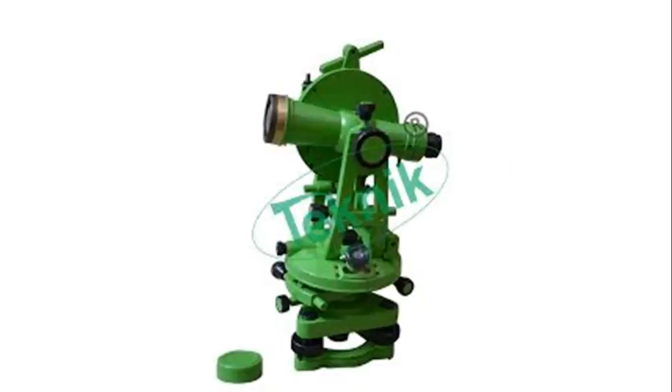So, before we discuss the setting out of curves, let us discuss some important aspects about the theodolite. So, you will see the picture of the theodolite here. Okay, let us discuss what are the various component parts of this theodolite. So, I'm starting from the bottom here. So, these are the three foot screws: 1, 2, and 3 on the back side. So these screws are used for levelling of the theodolite.

Okay. Now we have one screw here, and one screw here. So this screw is at a lower level as compared to this one. So this screw is called lower clamping screw. Okay, and the screw which is at a higher level is called upper clamping screw, or we call it lower plate clamping screw, and this is your upper plate clamping screw. Okay, now the screw which is adjacent to this lower clamp here, this one, is called slow motion screw for lower plate.

Okay, now similarly one screw is here which is not visible here. That screw is nothing but your slow motion screw for this upper clamping screw. So basically these two screws are very important. This is at a lower level, it is called lower clamping screw. This is at a higher level, that is called your upper clamping screw. And this screw is the slow motion screw for this lower plate, and we have one screw here that is the slow motion screw for this upper plate.

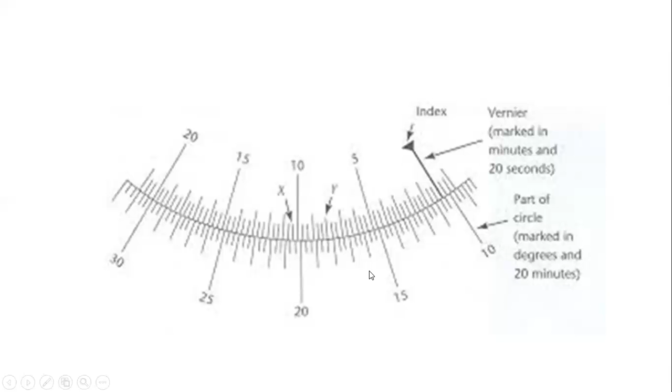So we have 10 degrees 20 minutes here, we have 5 minutes here, 20 plus 5 is 25. So 10 degrees 25 minutes, and this is your 40 seconds. So 10 degrees 25 minutes 40 seconds is the reading of the horizontal side. Okay, so in this way you have to take the reading of the theodolite.

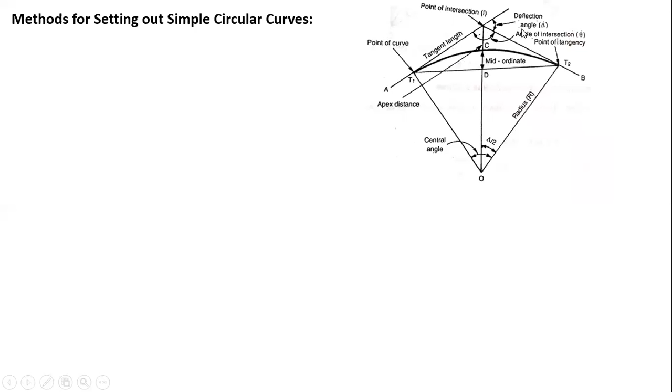Now I will come to the methods for setting out of simple curves. I explained this diagram in the previous lecture. The first step in setting out any curve is location of tangents. So this is the first tangent. This is the second tangent. So I have to locate 3 points. This point is T1, this point is T2, and this point is I. So how to locate these 3 points, I, T1, T2? This is the first step in setting out of the curve.

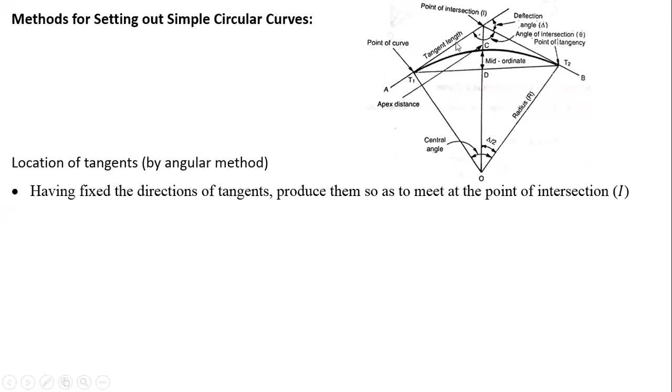So let us discuss having fixed the direction of tangent. This is my straight road here. When I extend this road, it will intersect at this point. So this is my point of intersection I. Now I have to set my theodolite here at the I location, set the 0, 0 reading on the horizontal side and sight the point T1, or locate your telescope in the direction of A with 0 degree 0 minute 0 second on the horizontal circle. So this is my direction of the telescope.

Next I have to rotate the telescope in the horizontal plane and measure this angle, that is the angle of intersection, which is nothing but your phi, and sight the point B. So this is my angle of intersection. Got the point? So I have to first locate the instrument at this point with 0, 0 reading on the horizontal circle. First, I have to sight the point A. Angle remains 0, 0. Then I have to rotate the telescope and sight the point B. So this is my angle of intersection.

Next, we have to find out what is the deflection angle. This deflection angle is equal to 180 minus this angle of intersection. Then calculate the tangent length. This is the formula for tangent length, we already discussed this last time: T is equal to R tan delta by 2. Delta is my deflection angle, which I just measured here. R is the radius of the curve, which is given in the problem. So we have to calculate the tangent length T.

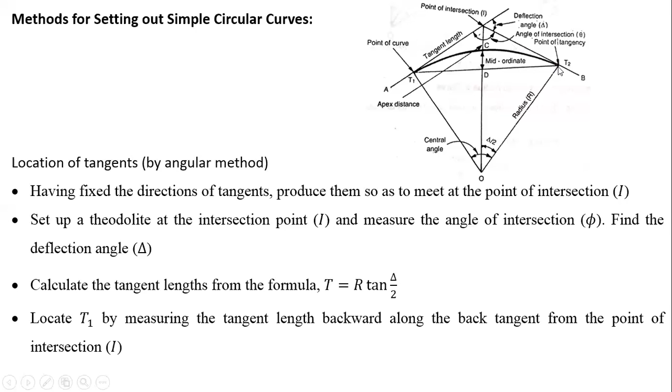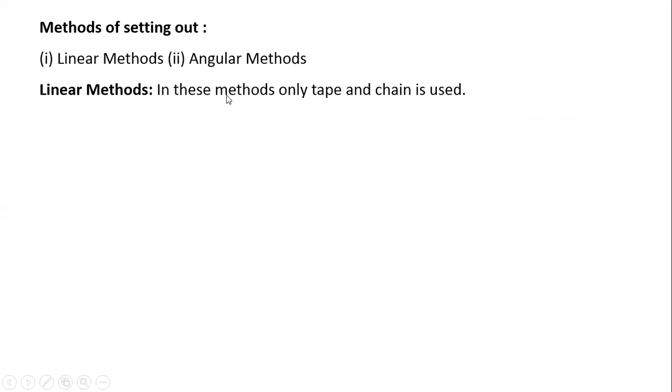Next is how to set out the curve. After setting these 3 points, there are two methods for setting out. One is called linear method, one is called angular method. In the linear method, only chain or tape is used. That's why it is called linear method. These methods are used when either a high degree of accuracy is not required or the curve is short. So for unimportant curves, we go for this linear method.

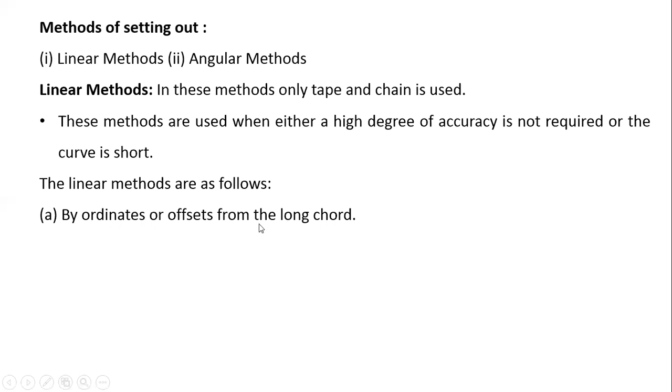The linear methods are as follows. There are 4 methods: by ordinates or offsets from long chord, by successive bisection of chords, by offsets from tangents, which has 2 methods, perpendicular offsets and radial offsets, and D, by offsets from chord produced. Among these 4 methods, the last one is the best method and is usually employed for the curve layout when a theodolite is not available.

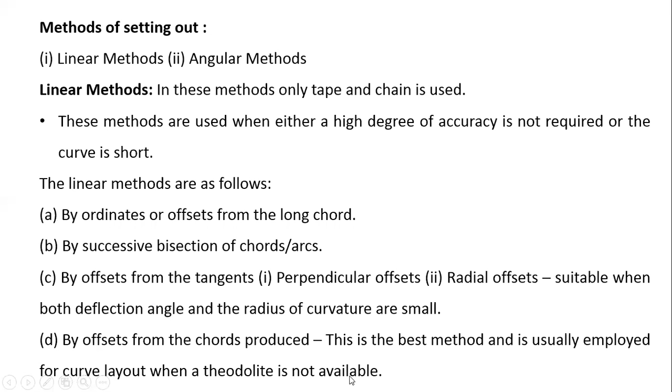Okay, so this method is the best method for setting out of the curve. Okay, so

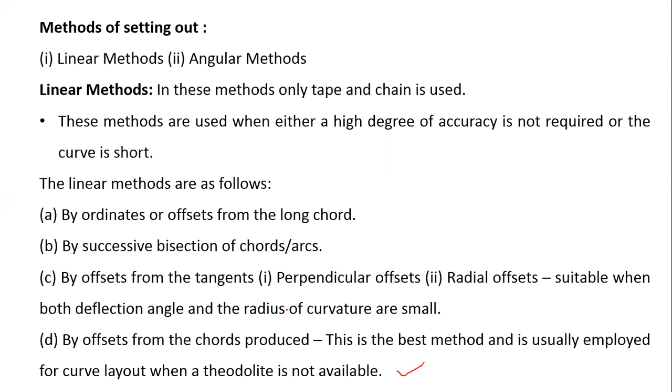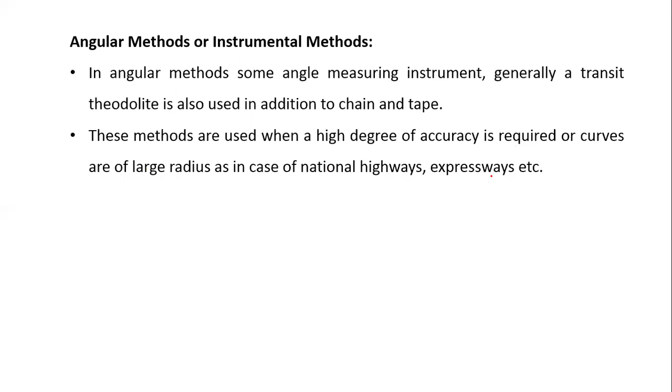Next is your angular methods. So in case of angular methods, some angle measuring instrument, generally a transit theodolite, is used in addition with the chain or tape. So these methods are used when a high degree of accuracy is required or the curves are of larger radius, as in the case of national highways or expressways. So for important curves of highways and railways, we are using the angular methods or the instrumental methods.

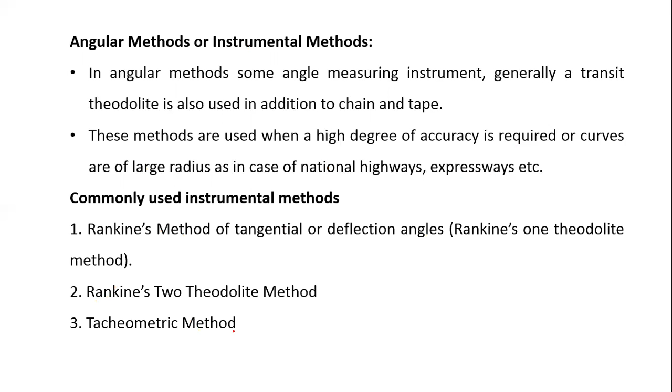Now the commonly used instrumental methods are Rankine's method of tangential or deflection angles. This method is also called Rankine's one theodolite method. Then we have Rankine's two theodolite method, and the third one is your tacheometric method. So in our course, we have 2 methods, the first method and the second method. We will discuss these 2 methods now. So let us first discuss setting out the curve by Rankine's method of deflection or tangential angles.

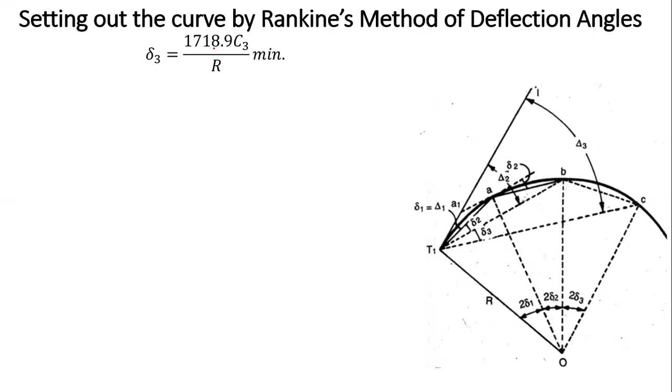Similarly, del 2 is equal to, just in place of C1, I put C2 here. That's all. Everything remains the same. So similarly, del 3 is equal to 1718.9 C3 over R in minutes, or del n is equal to the same constant. In place of C3, it is Cn by R in minutes.

Okay. I have to calculate the total deflection angle for the first subchord. As I told you before, this del 1 is equal to capital delta 1. So capital delta 1 is equal to del 1 is equal to angle IT1A here. Okay. So for the second chord, delta 2, from here to here, is equal to what? IT1B is equal to angle IT1A plus, this is my plus sign, okay, plus A T1 B. Okay, so make it plus sign here. So this is equal to how much?

Delta 2 is equal to, this angle is your del 1, and this angle is your del 2. Now delta 2 is equal to capital delta 1 plus small del 2. Okay. Similarly, capital delta 3 is equal to, the previous angle is capital delta 2 and current angle is del 3. Okay. So delta n is equal to delta n minus 1 plus del n. So these are the relations for calculating the total deflection angles.

Now check in the last, when you come to the last point here for T2, the total deflection angle for the long chord should be equal to delta n is equal to delta by 2. That is total deflection angle divided by 2. Okay. So just remember these two things. One, the expression for del, that is 1718.9 C over R in minutes. Okay. The first total deflection angle is equal to the tangential angle, that is your del 1.

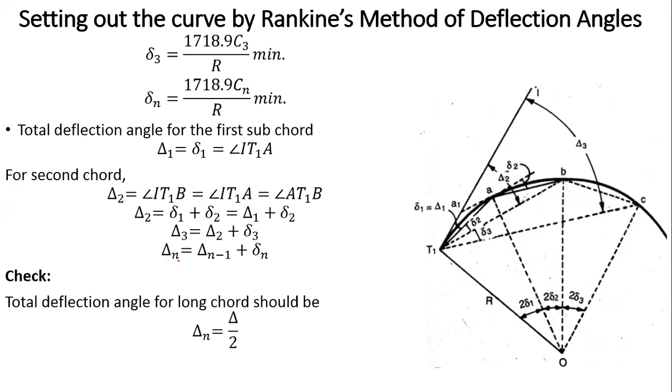Then delta 2 is equal to delta 1 plus del 2. Delta 3 is equal to delta 2 plus del 3. Okay. Delta n is equal to delta n minus 1 plus del n. Here. Now, how to set out the curve?

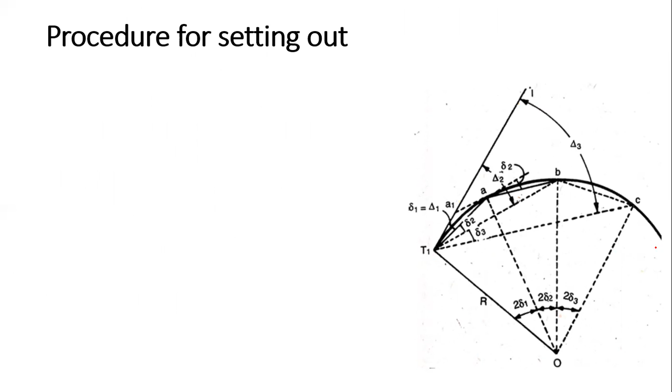Now, for setting out the curve, first you set out the points T1 and T2 and I. As I told you in the beginning of this lecture, these 3 points are established in the field. Then after establishing these 3 points, first I have to set my theodolite at the point T1, and make the horizontal circle 0 degree 0 minute 0 second, pointing the telescope towards I, with 0 0 0.

Now next, I will rotate the telescope in the horizontal plane and make an angle delta 1 on the horizontal circle, so that my line of sight will be in this direction. Clear? This is your extension in this direction. So this is angle delta 1. Now I know what is my first subchord. We have a calculation and we know what is the chord length here. This chord length, this chord length, this chord length. Okay. So I have all the details here.

That is, we have the relation del is equal to 1718.9 C over R in minutes. Okay, so I have the data, I have the radius of the curve, I have the chord length, so I know this deflection angle. I have to make this delta 1 equal to capital delta 1, so the line of sight will be in this direction.

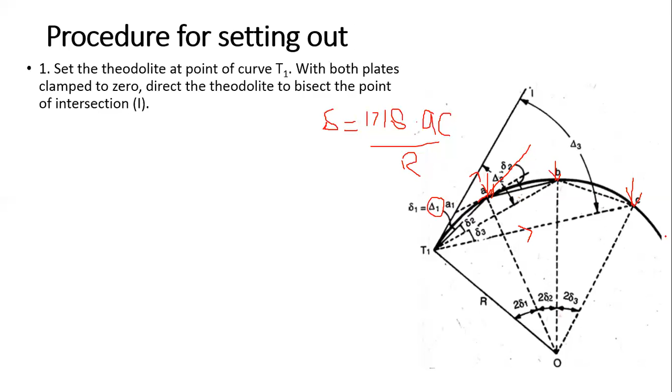So in this way, three points are established: first point, second point, and third point. So I have to establish all other points. And when you join all these points, this is my curve. So this is the procedure of how to set out the curve with the help of one theodolite. This is all about the procedure. Now,

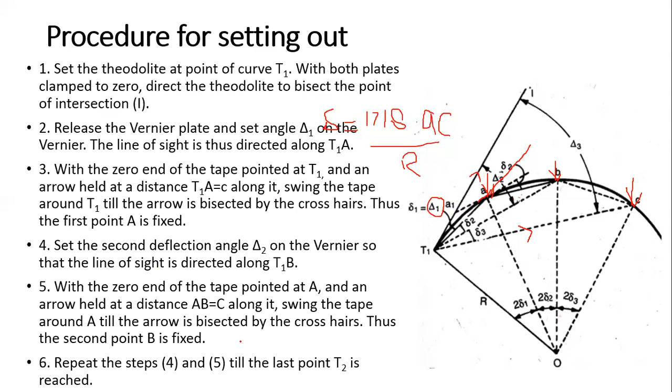the other method is Rankine's two-theodolite method. In this method, two theodolites are used, one at the point of curve and the other at the point of tangency. So I have to put two theodolites. One theodolite is here, another theodolite is here. Now this method is used when the ground is unsuitable for chaining. If a lot of bushes are there or some water is there, we cannot do the chaining or taping in this region. So when the ground is unsuitable for chaining, we have to go for two theodolites.

Now, what is the principle? The angle between the tangent and the chord is equal to the angle which that chord subtends in the opposite segment. Now this is my chord and this is my tangent. So the angle between a chord and a tangent is equal to the angle which that chord subtends in the opposite segment. So this is my opposite segment here. If this angle is delta 1, this angle is also delta 1.

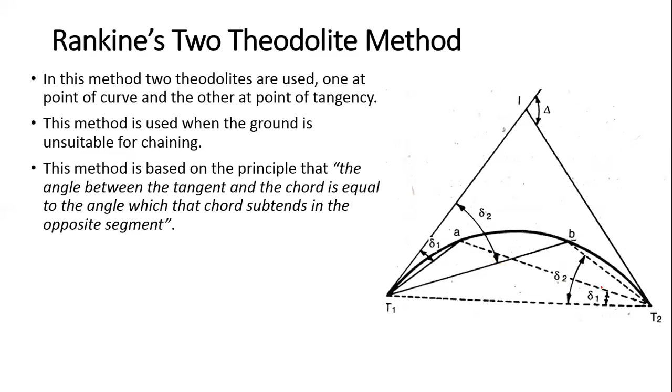For the second point, this is my chord here. One segment is this one, another segment is this one. If this angle is delta 2, then since the angle between a chord and a tangent is equal to the angle which that chord subtends in the opposite segment, this is again delta 2. So this is the principle of this method.

Now, what is the procedure? One theodolite is established at this point, another theodolite is established at this point. Now with 0 degrees, 0 minutes, 0 seconds, I have to first sight this point, that is the point of intersection. Similarly, with 0 degrees, 0 minutes, 0 seconds, I have to sight this point T1. Now I have to make an angle delta 1 on this theodolite. So my line of sight will be in this direction.

Similarly, at the same time, I have to make an angle delta 1 on this theodolite also. When this angle is delta 1, the line of sight will be in this direction. So at one point, the two lines of sight are intersecting. Where these two lines are intersecting, this is my first point on the curve. So I have to

guide my partner on the ground, so that with the help of a ranging rod, he can move here and there slowly until the ranging rod is bisected by the cross hair of both theodolites, that is this theodolite and this theodolite. Then you have to fix the ranging rod on the ground. So this is my first point on the curve.

Similarly, I have to make an angle delta 2 here. So the line of sight will be in this direction. Then again, at the same time, I have to make an angle delta 2 from this theodolite. So the line of sight will be in this direction. These two intersect at this point, so we have the second point here. In this way, all the points are established on the field. So this is your two-theodolite method.